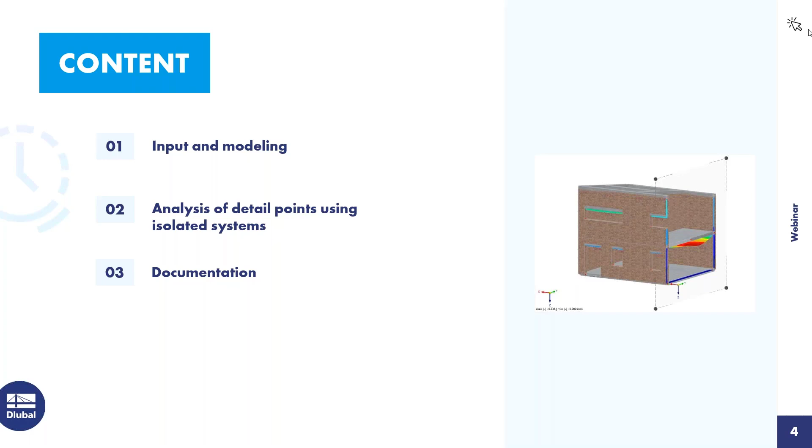So today's webinar, the content of today's webinar is masonry. Today I want to model a building from the beginning in RFEM. In the second part, I want to take a look at some detail points, especially connected to the masonry material. And in the last part, I want to show how you can document the results of the program.

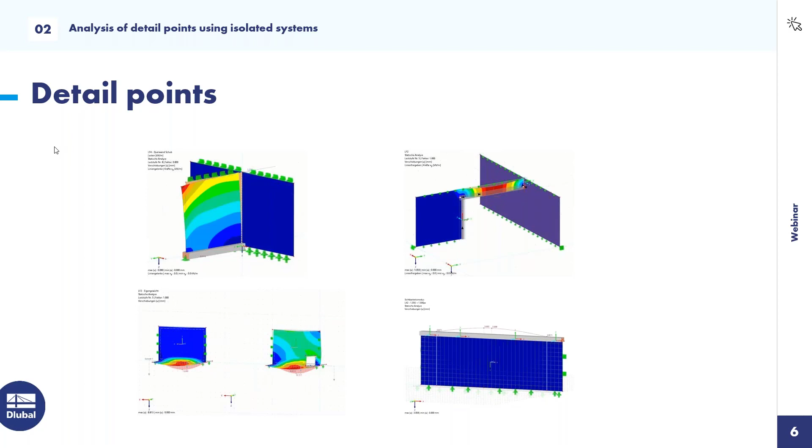In the first part, we will insert a small building in RFEM, and I want to show you how to do it. In the second part, I have chosen some separate models where I have prepared things to take a look at some details. And as I said, the last part is the printout report. So now I want to switch to the program.

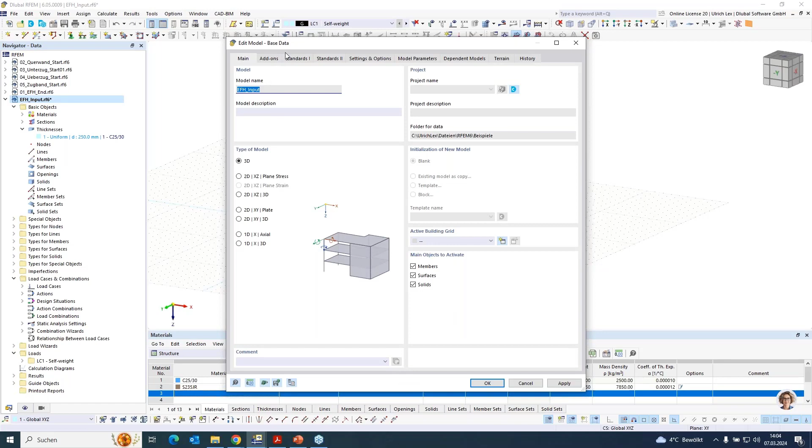Okay, I have already created a new file, a new project in RFEM. It is important when you create a new project that when you want to use masonry, that you check on the add-on masonry. Otherwise, you cannot use the material model for masonry design.

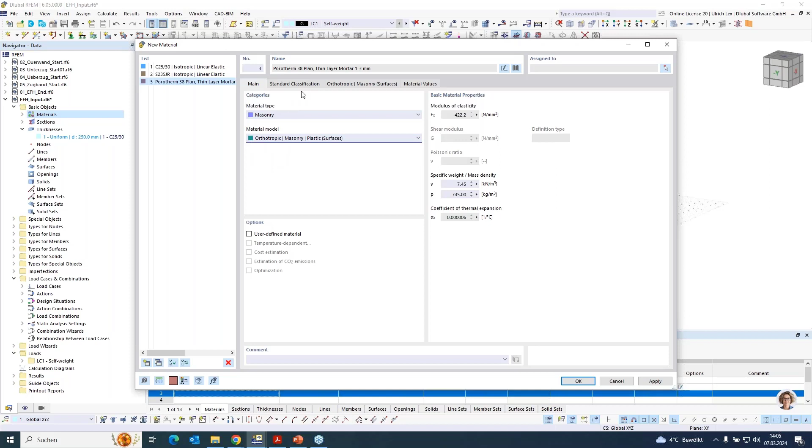So as a first part, I want to create a new material. You can use some values from the database as material type masonry. Maybe you can choose one product you want, maybe Porotherm 38, and have to choose the material model, the orthotropic masonry plastic. If there are some products not available in the database, you can also insert it manually.

In this tab, standard classification, you can choose the grouping of your product. You can choose the mortar you used. You have to insert the dimensions of the stone, and you have to insert the compressive strength. With all these values, RFEM automatically computes the data needed for the material model, such as the modulus of elasticity, the shear modulus, or the allowable or ultimate compressive strength, or the ultimate tensile strength.

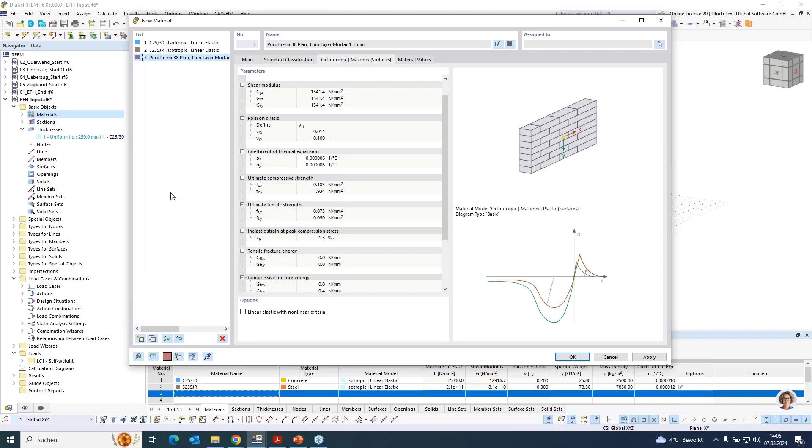So I want to create now a second material, maybe for the inner wall. It's the same as before. Choose one product, maybe this Porotherm 17-50, and confirm with OK. The second thing I want to do is create a thickness.

All surfaces do need a thickness. So the first thickness is already in, it's 250 millimeters with concrete for the foundation maybe. The second thickness I will create is 200 millimeters for the concrete slab. The third thickness I want to use is our masonry material, 380 millimeters. And the fourth thickness, I want to use the material for the inner walls with thickness 170 millimeters.

If I have done this, then I can start with the modeling. Here I have a building with the dimensions 7 by 9 meters. I use my grid points to create the first floor, 7 by 9 meters.

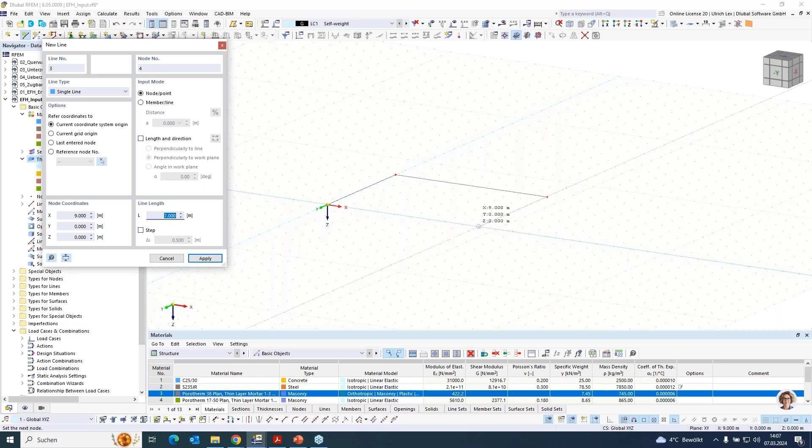Here I can directly assign, with this select boundary, my foundation plate, thickness 250 millimeters concrete. Okay, and choose the lines.

So in the second part, I want to change my work plane and create a new surface. I want to choose now the thickness for the outer wall, with a height of 3 meters.

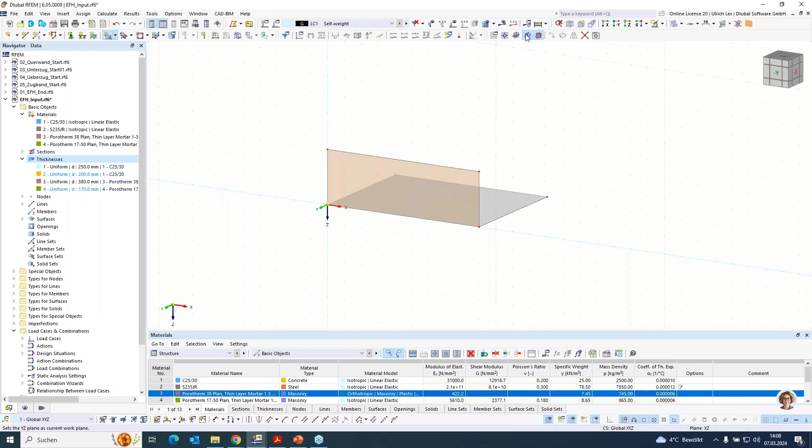I can change my work plane and create the second walls. Now I can directly copy these walls, and the first things are done.

Now I want to create the first concrete slab. Okay, and choose the outer lines.

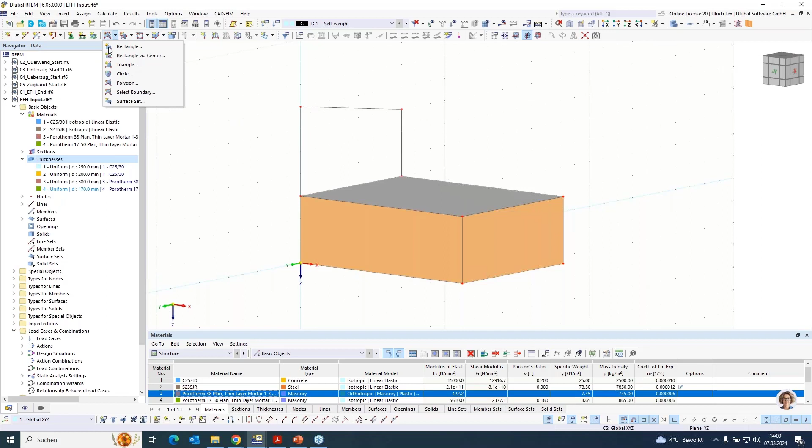So the second floor will be in the front a height of 4 meters and in the back a height of 3 meters. As I did before, I can use select boundary with 380 millimeters and select and copy this surface.

And at the end, the wall in the front and at the back. Choose all these lines, turn around it, and choose the rest of the lines.

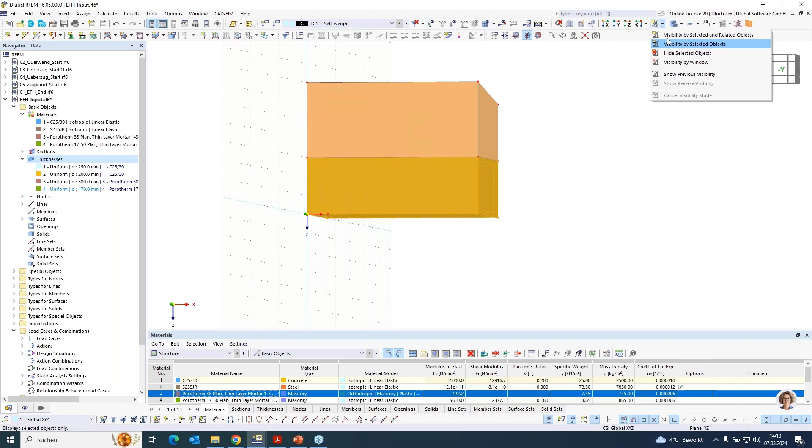Okay, now I want to create my inner walls. There I select only the ground floor, change my working plane, and start to create the lines for the inner walls.

1, 2, 3, and 4 meters. My grid has a space of 1 meter, so I can use it directly for my modeling. Change my working plane and just copy the lines to these points.

So the second wall is in the second floor. I cancel my visibility mode and create here new lines. And the second wall is maybe from here, 1, 2, 3, to here.

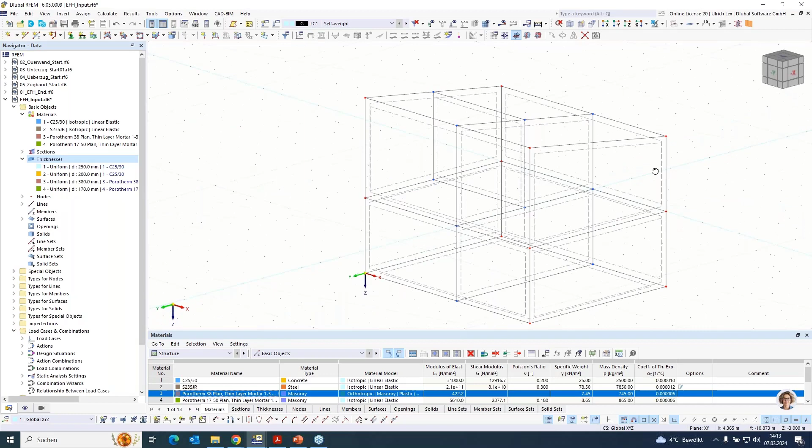Here. And the third one. So now all my walls are created.

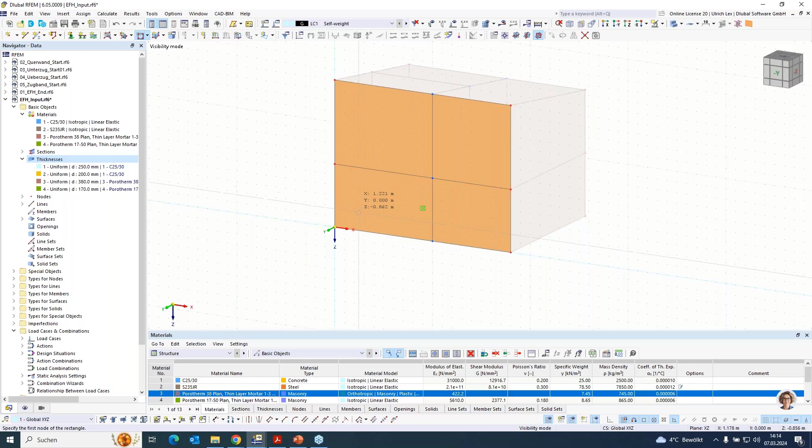As the next part, I want to create some openings like a window or a door. I select again my wall in the front, change my work plane in this plane I want to work, I change my space of the grid points, divide the space 2 times, and now I can use the option create a new opening with 250 high and 150 width. I create a new window.

Here it's one. I just want to change it to 250 meters, and create a window with 1 meter to 150.

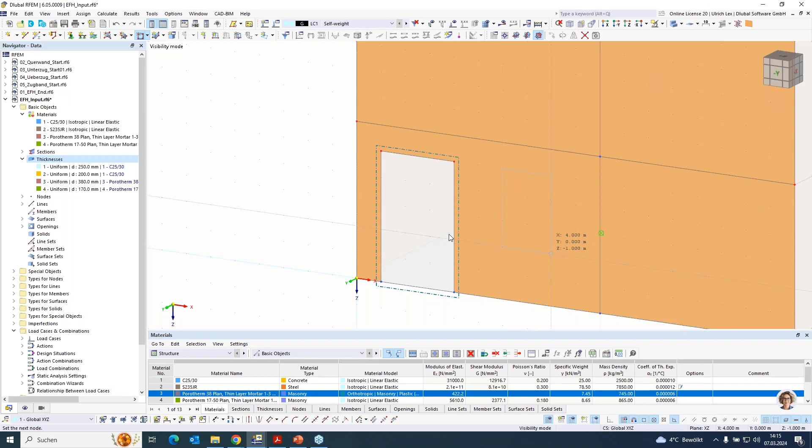The same maybe in this part, and the same in the second floor, maybe a little bit bigger window, and the same here.

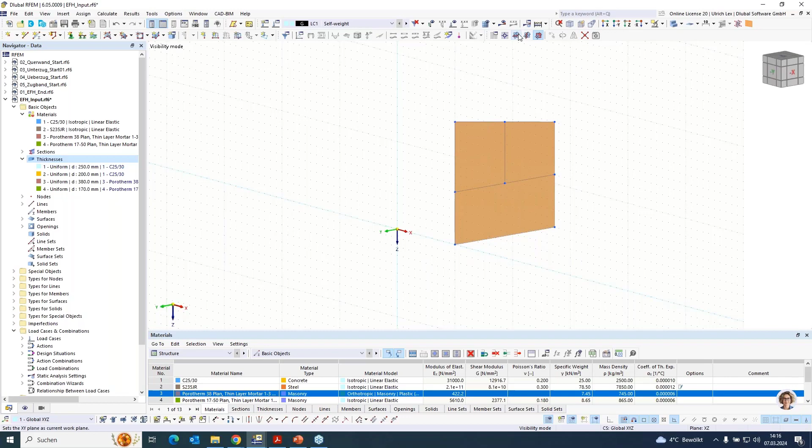In the inner wall, I want to have a door too. So I select my inner walls. I can switch off the background, the hidden objects. For better modeling, I can change my working plane, select the grid point, and can create now here a big door.

So in case of using material masonry, then it is important in case of openings that you create something like a lintel above. It's because if you do not assign a lintel, it could be that the system will be unstable because of the missing tensile strength, or the missing ultimate, or the very small ultimate tensile strength in the area above the opening. So that's why we create here now a lintel.

I double click on the line, create a new member. It's a member type beam. I want to select a new section. I can create a new section, maybe with the width of 380 millimeters and the high of 150 millimeters. Material concrete is okay. Okay.

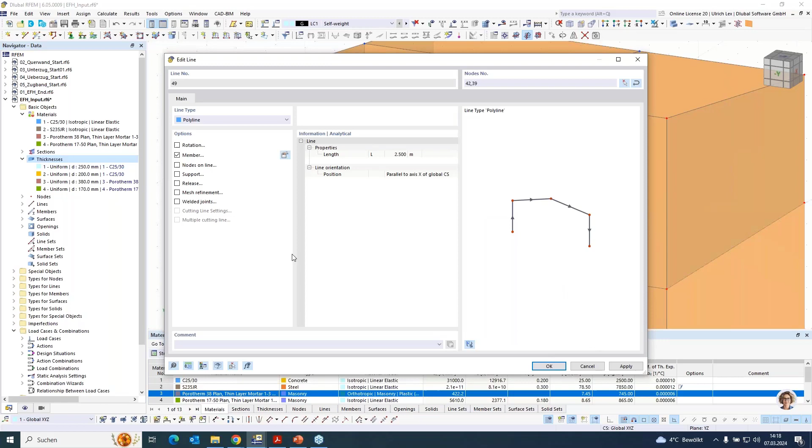And the second thing is when the window is too big, then it is good to have this lintel a little bit inside the wall. It's because the force from the lintel should not directly insert into the material masonry in one FE node. So we create a copy of this node, create a copy in X direction, maybe 125 millimeters, and the same on the right side.

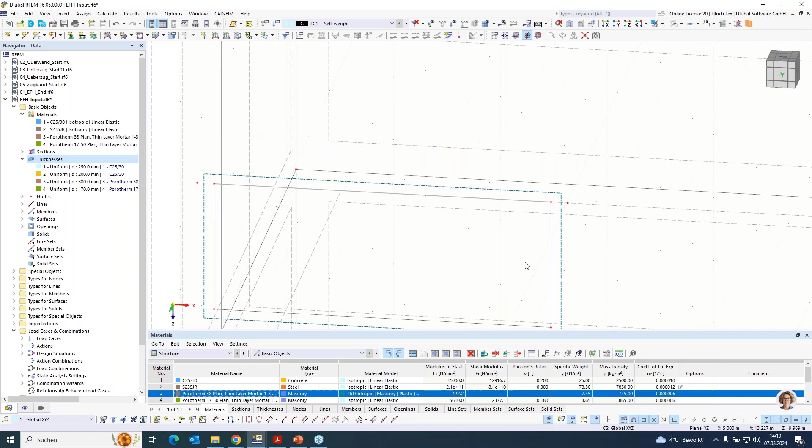And create here a line and a section too. Okay, and okay. The same for the other openings. I select all these lines, double click, and assign a new member.

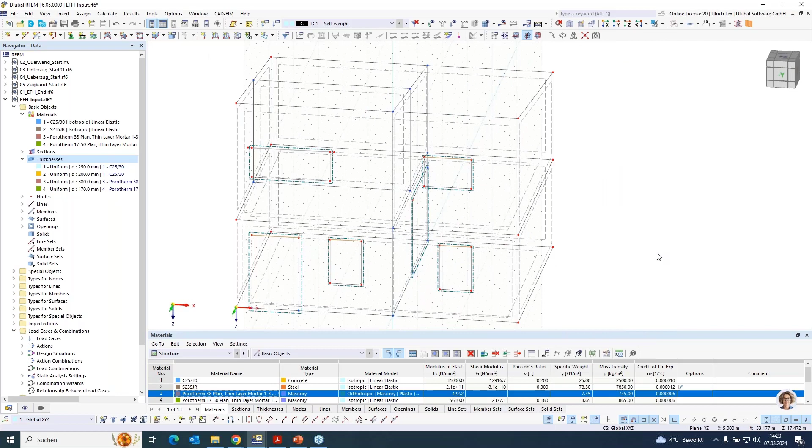Okay, the same I will do in the inner wall. I assign a new member. Here I use a little bit bigger section, so I create a new one, maybe 170 millimeter width and 250 millimeters high.

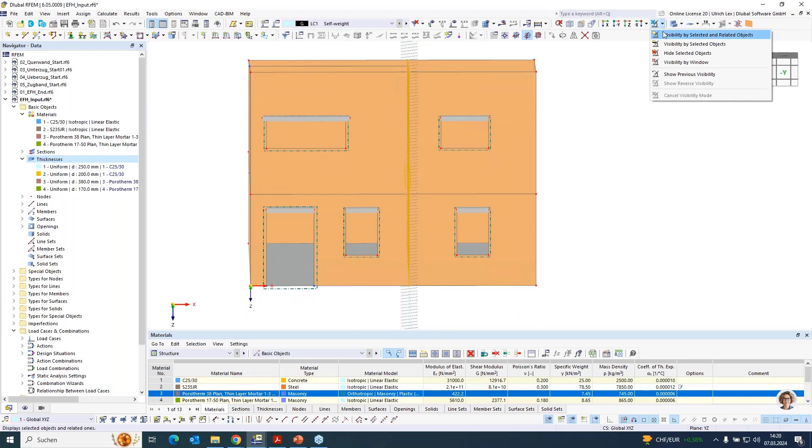Okay. Here I could create, I could let this lintel be in the masonry wall too. It would be maybe good on this place, but this example I will have in the details.

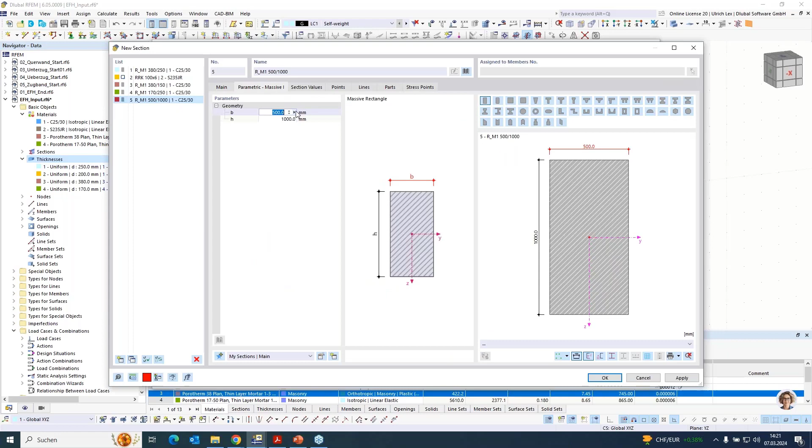So the next part on such a building is on the top of the masonry. We need something like a ring beam. You can create it easily in RFEM when you select all lines where you want to assign such ring beam, and can assign again one member, choose a section, create a new one, maybe 380 and 250.

Okay, apply with OK. And then you have created this ring beam.

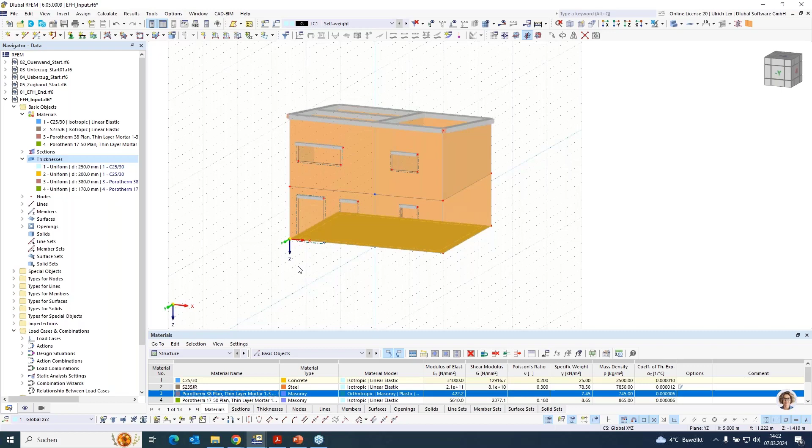As a last part for modeling, you have to take a look on the wall slab connection. It's a very special thing for masonry buildings. Each time where the masonry wall does not stand fully on a concrete slab, you need a special connection. It's called in RFEM slab wall connection, and you can assign it if you double click on the surface and assign a new hinge.

Create here a new line hinge, and here you will find the option slab wall connection. As I said, it's used each time the masonry wall does not stand fully on the concrete slab. In case the wall stands fully on the slab, the material model itself can handle it. Only if the wall is not completely supported do you need this hinge.

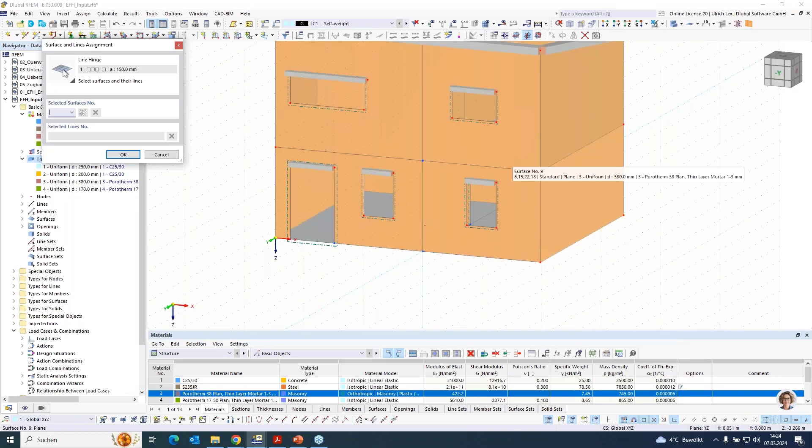So if you have checked the option, you get the new tab with wall slab connection. Here you can insert the offset, maybe 150 millimeters. If you have a block width, you can insert it; if not, we leave it at 0. We have to choose the lines where this hinge should be assigned.

It's all the lines, all outer lines. Oh, I had to go back one step. I had to first connect these lines and members, because here I have a double line, so I use this option connect lines and nodes.

So I will have no double lines and nodes in the system. Then I can assign this hinge again, create a new line hinge with wall slab connection with my offset 150 millimeters, and assign it to all these outer lines.

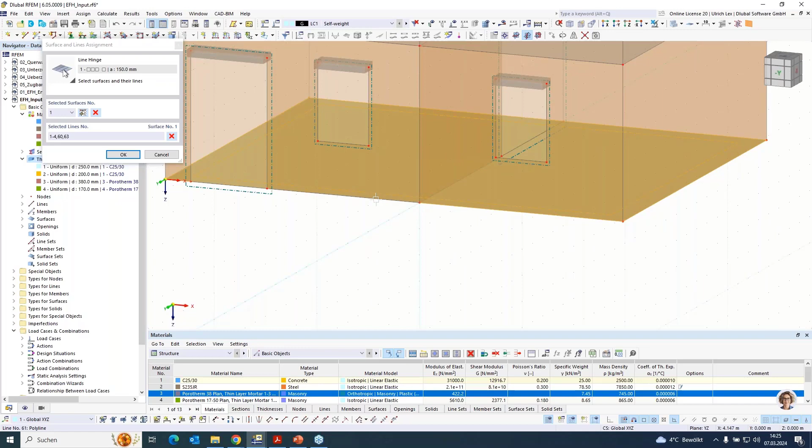Continue with OK. And now it's important to generate this line hinge with this button on the left. Now two line hinges are created. I can continue with OK, and I will see that my line hinge for the masonry wall is created.

Here I can double click. It's yellow because it's created from the master line hinge, and here is a force moment diagram assigned.

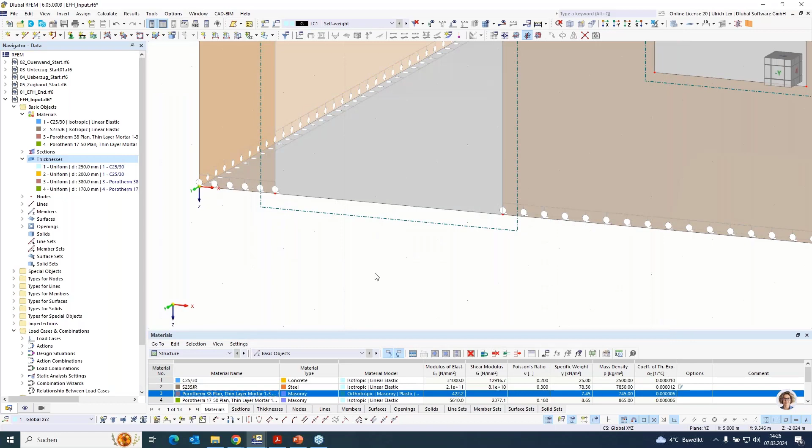Okay, I will do the same for the slab in the first floor. Double click on the surface, assign a hinge, create a new line hinge using slab wall connection.

If I have the same offset, I could use the same hinge too, but now I generate a second one. Choose all outer lines. Continue with OK. Generate the lines. Continue with OK. And now I can see that for the wall above and the wall downside, two separate hinges have been created.

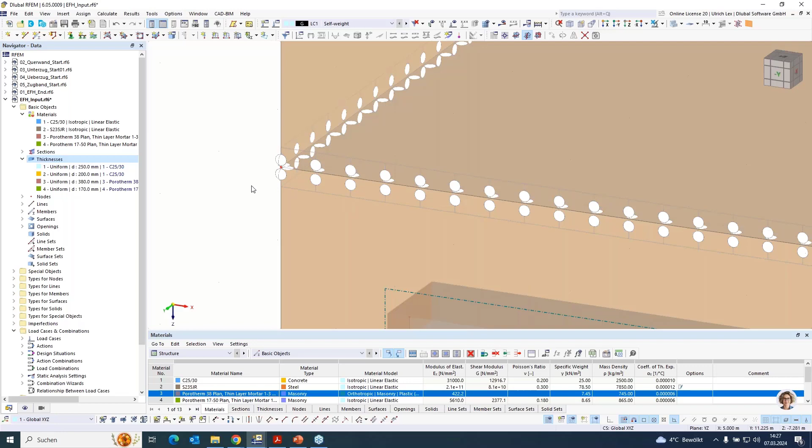Okay, as a next step, I had to choose and support. Here I want to choose a support for the base plate, supported simply as a rigid plate.

Okay, and for the last step, I had to create some loads. The self-weight is created automatically. As a next step, I will create the live load and self load.

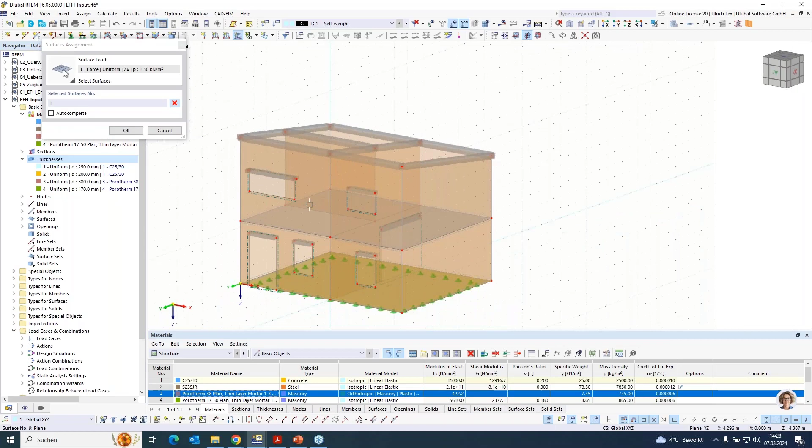Okay. Choose maybe for the self-weight 1.5 kilonewton and assign it to my slabs.

And the same for the imposed load, maybe 1.8. And continue with OK.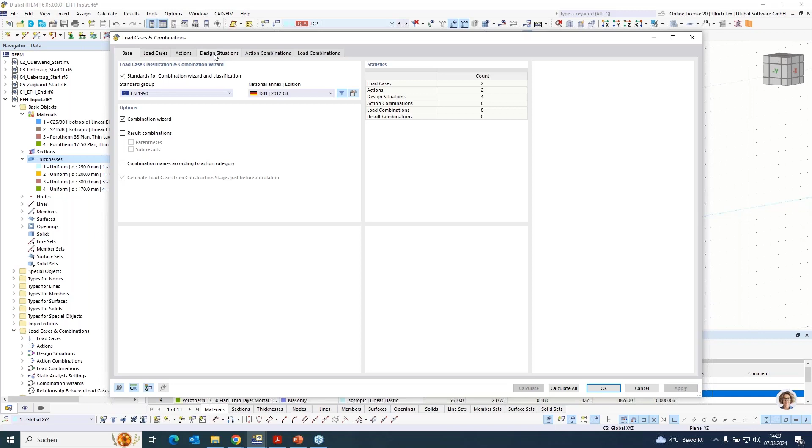The combinatoric is done automatically if you have set the combination wizard on. Then you can choose the design situations and create a combination wizard where you can choose a static analysis setting. For masonry, it's good to compute geometrically linear or with large deformations; it's best for the material model. And for the nonlinear plastic material, it's important to increase the number of load increments, maybe to 3. You can allow a little more iterations, and here you can save the results of all increments.

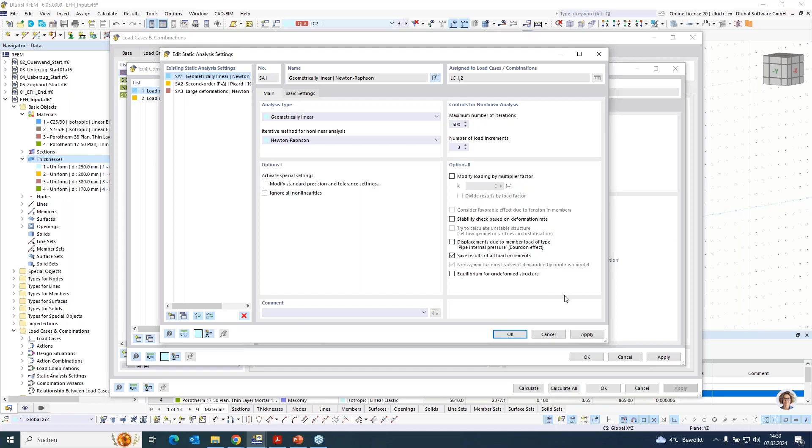Then you can take a look at increment 1 or 2 too. Okay, continue with OK, and you get now the load combinations here.

So as a last step, we can take a look at the mesh settings. For masonry, we normally use something about 0.25 to 0.2. You can click OK and apply, then the mesh will be created.

Please be a little bit careful that you have a good mesh, because it's very important for the calculation, for the nonlinear calculation.

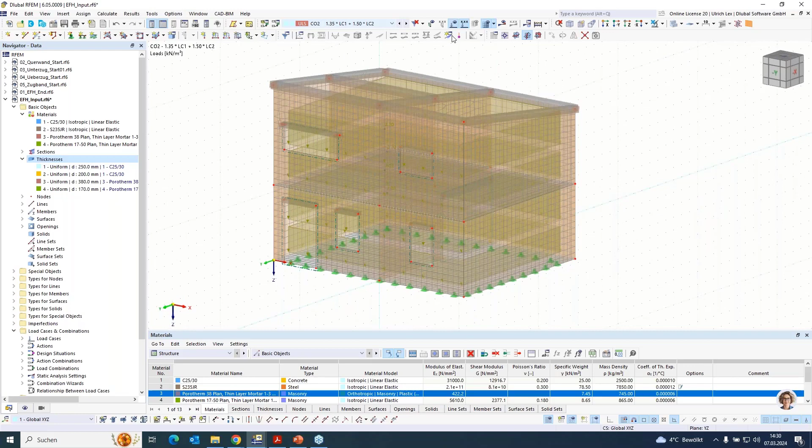After that, we can compute the first load case, and when it's computed well, we can go to the second part, to the details. Here you can see the calculation process where the system is computed with the first load increment, now the second, now the third, and then it should be finished. Exactly.

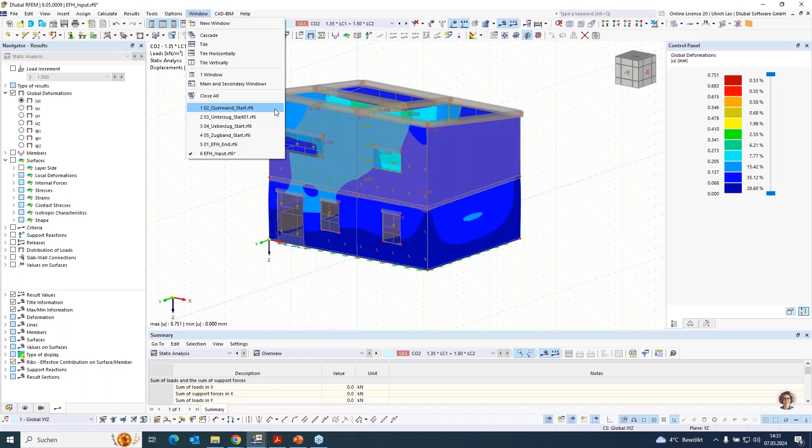Now I want to switch to my detailed systems. Here I have the first one, a part of masonry where you have maybe some outer exterior wall, and one interior wall. Mostly you have two different materials, as I chose before, like a wall with 380 millimeters width, and for the inner wall, a different material with 170 millimeters.

If you build up these walls, generally the outer wall is created, and after that the inner wall will be created. So the connection between these walls is not rigid, I would say.

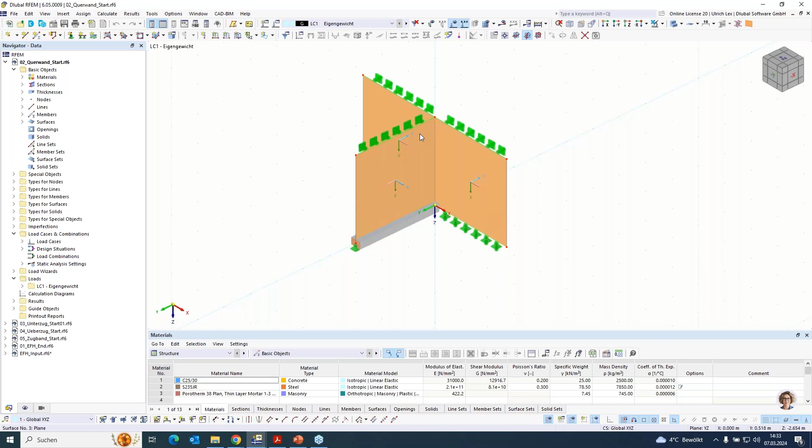Here are a lot of things you can use. One thing is you can use a wall connector. I looked on the internet and found something like this - this is a wall connector. It is assigned in each row of the masonry stone and connects these both walls. But this wall connector cannot transfer shear loads, I would say. These connectors can only transfer tensile loads. So how can you create or consider this in RFEM? I want to show you now.

When I take a look in the data sheet, I find that one connector can have a maximum tensile force of 0.5 kilonewton. It's assigned in each row, so you have 0.5 divided by 0.25 from the height of my stone. Then I will have a force of 2 kilonewtons per meter in this edge.

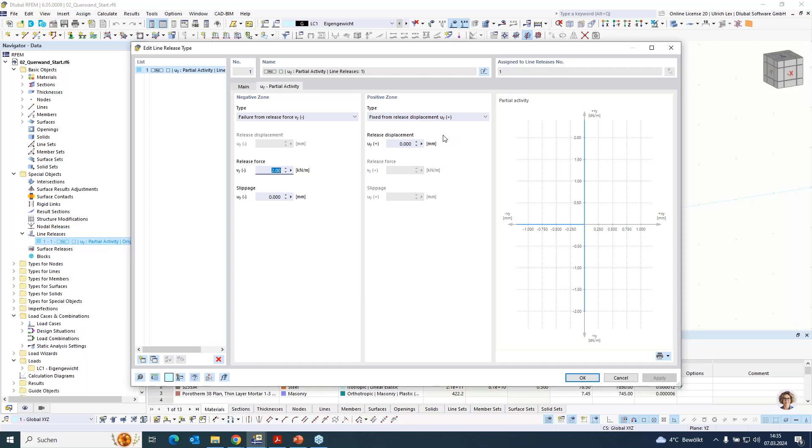To create this, I can use the special object line release and create a new one. As a release type, I can choose partial activity in Y direction. This partial activity could be that the connection is released from a force of 2 kilonewton per meter. In the pressure direction, I would say it's fixed now, but here you can release it too.

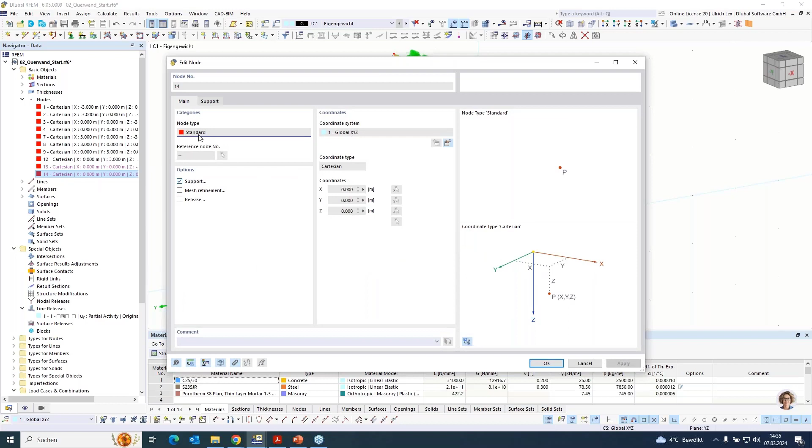So this release I can assign to the surface. I can say my released objects after that are the surfaces. Continue with OK. Now the whole line is released. That's why I have to assign on node 14 - this is this node - a new support. My system will get unstable. Okay.

So after that, I will create a new force, maybe a horizontal force of 5 kilonewton in direction Y. Okay, and I want to compute this system. So for the mesh, I set it as before, about 250 millimeters. Here I increase the load increments so I can show you the results better.

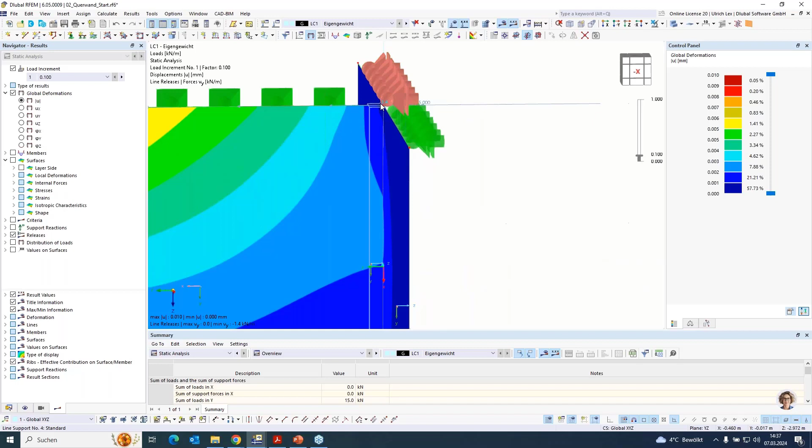So you can see that the inner wall is released from the outer wall. When I go some load steps back, maybe in the first one, we can see that the lines are connected - we only have a force of 1.4 kilonewton. When I increase the load, you can see that the release of this inner wall is getting on.

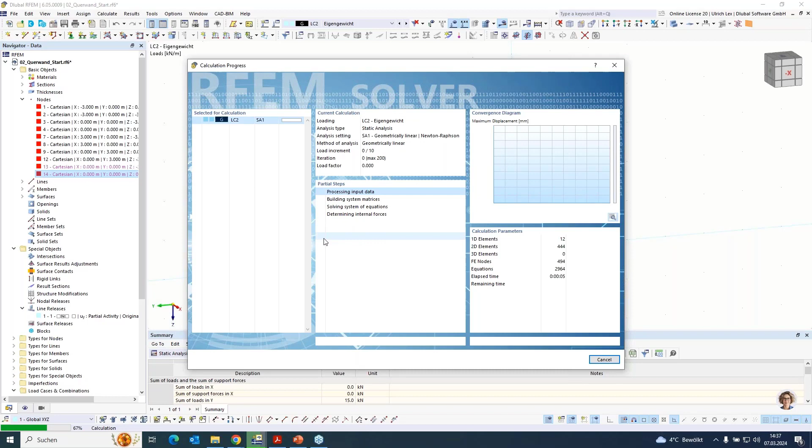As a test, we can create a second load case where I copy load 1 and change the direction of the load. And here it should now be connected to the outer wall, to the outer wall. And this is exactly what we want to have.

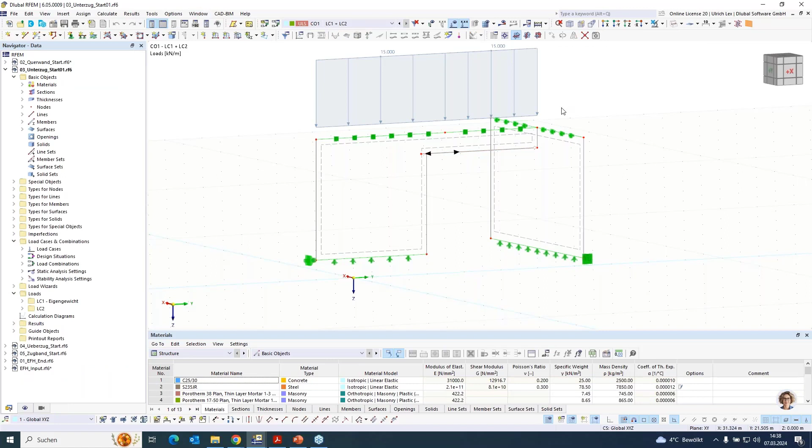As a next example, I want to show you my system with the lintel. Here I have the problem that the connection between the inner wall and the outer wall is not, I would say, not connected. Only the lintel, or the force from the lintel, should be reacting in this outer wall.

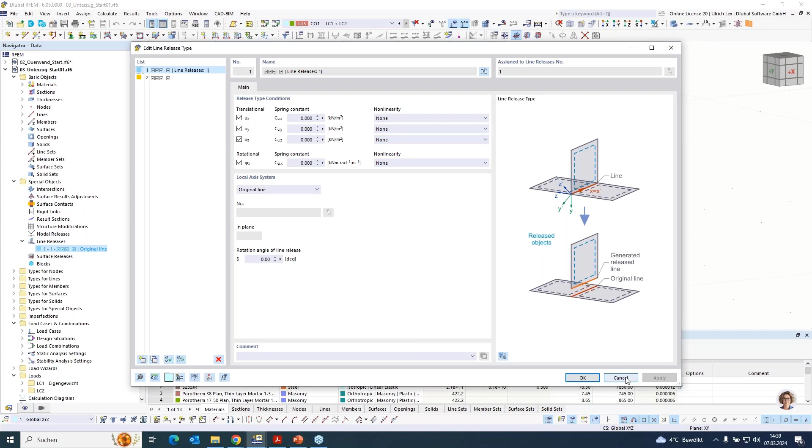So I can continue as before and create a new line release. I assign it to this line. Okay. Now I choose the release type 'fully' because I'm not sure if here a wall connector is really built. So on the safe side, I did not connect these two walls on this place.

So I have to release the wall. And now I want that the force from the lintel acting is not released - it should be acting on this outer wall. That's why I can define this definition object, my node 4. So there is no release created, and the force is acting on the outer wall.

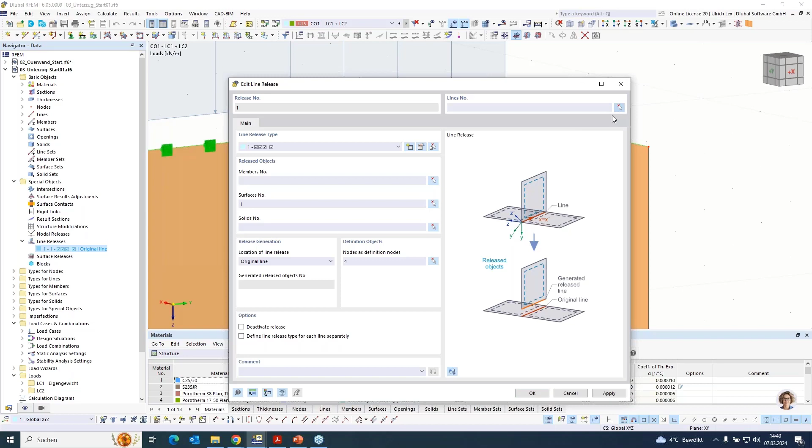Continue with OK. And now I see on this one node, no new node is created, and here a new node, a release node, is created. Okay, just take a look on the results.

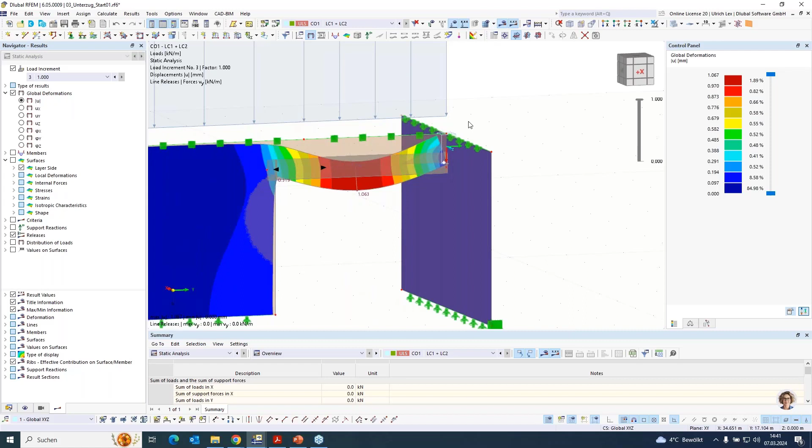And when I take a look on the deformations, I see that my masonry material is released, and my lintel force is acting on the outer wall. I can also see this when I take a look only on the outer wall. And here I see that the whole load from the lintel is acting on this one FE node.

Maybe this could also be a problem, that here so much load is acting on one node.

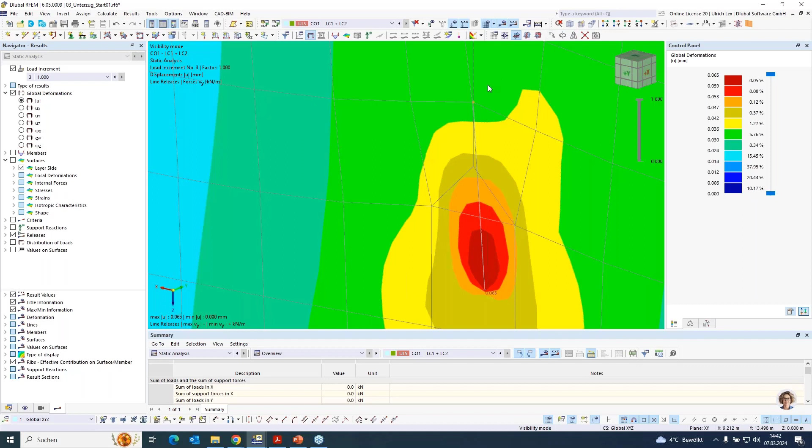If this is a problem, then you have the possibility to copy this one node, and a second time in the other direction, and create here or assign a small beam, maybe a rigid beam, so that the force is smoothed in this point.

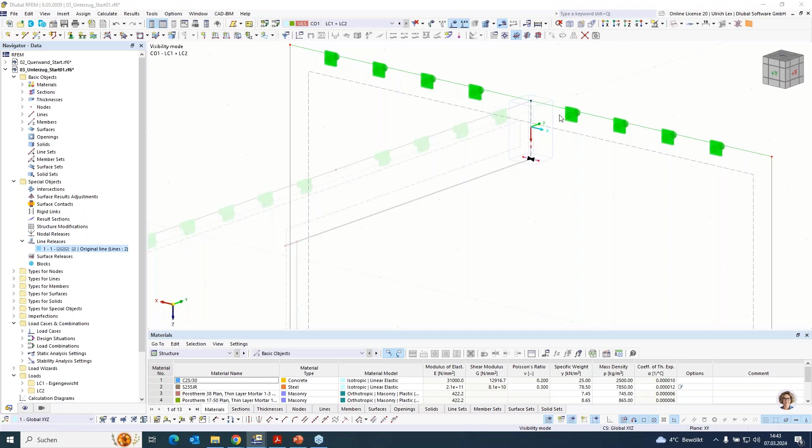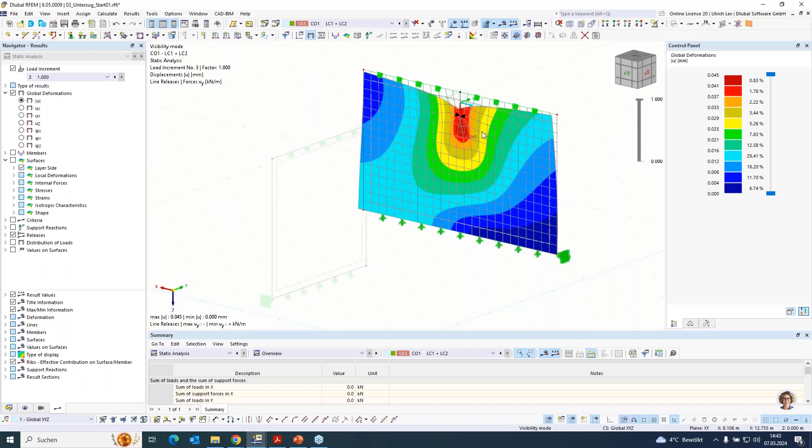If you take a look on the results, it should be the same as before. Only with the smoothing in this one node, the force in this node is a little bit smoothed. So this could avoid some problems if one point of the material is overloaded.

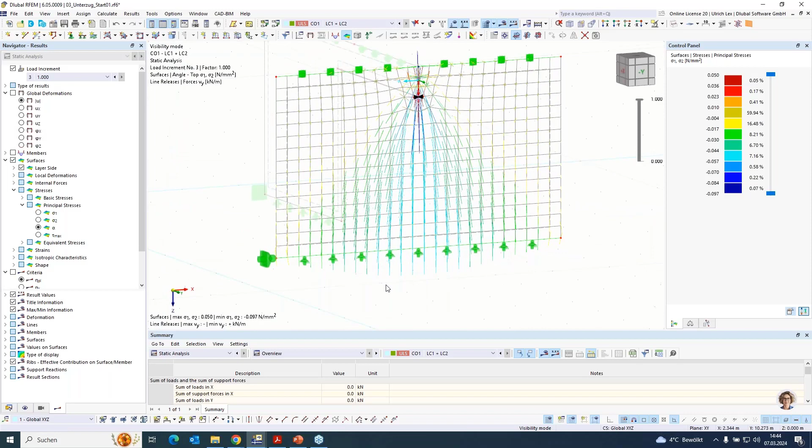So here you can see when you take a look on these criteria - or maybe not the criteria, if you take a look on surfaces and the stresses on this alpha - you can see the load distribution in the wall. As is common for masonry, we have a distribution from maybe 60 degrees in the wall, and the same you can see in the support reaction, where we have in this area this load from the lintel.

Okay, on the second side, there could be problems too. When we have here now a too big force from the lintel, it's depending on what is on the floors above. It could be that on this place maybe should be located a concrete column, but this is also easy to do.

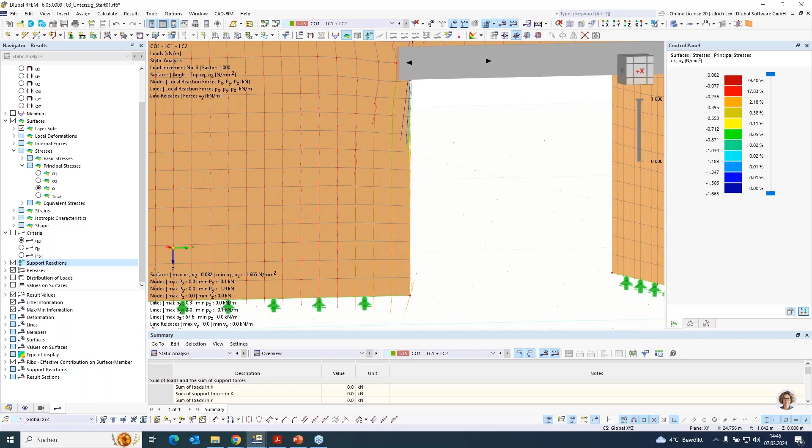When you double click on the line, can you create again a new member, as a beam, and create here a new section. Maybe 170 to 170, as a concrete column.

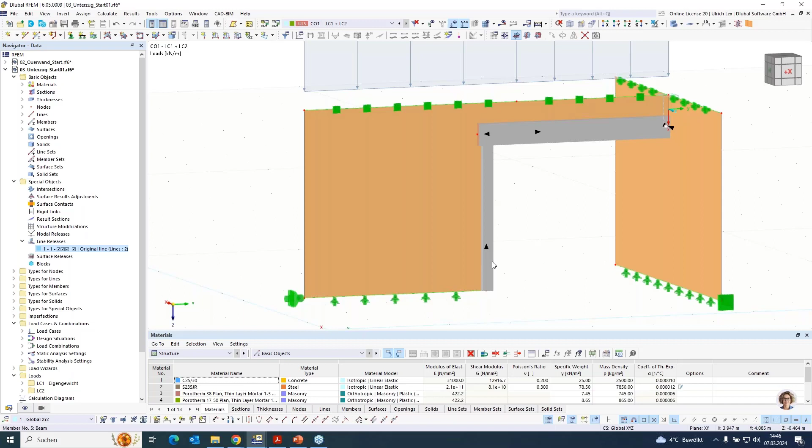So one thing you have to do, or think about, is that the masonry wall is now connected fully with the concrete column. Here you can insert again something like a new line hinge, and let it free in z direction, so that no shear force is between the concrete column and the masonry wall.

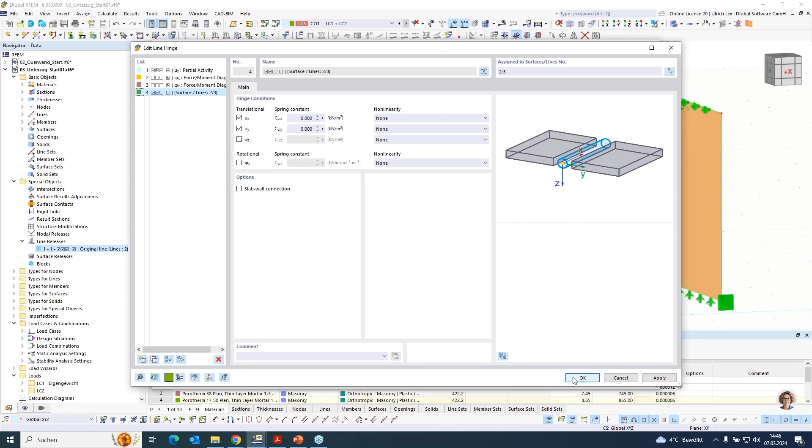Okay, so these were the problems of this example, and now I can take a look on the next example.

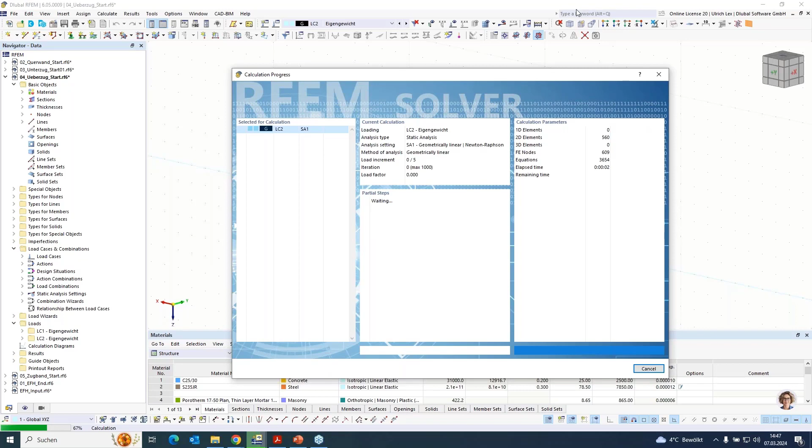When you have something like a wall above a concrete slab, where you have no support in the floor below, then when you take a look on the results, you will see that the masonry wall is acting similar to a beam. You will have some forces like a pressure arc in the masonry wall.

It's normally only important to know it, because when here now should be created afterwards an opening, then this pressure arc is destroyed and the behavior of the wall is different, and therefore you need maybe more reinforcement in the concrete slab.

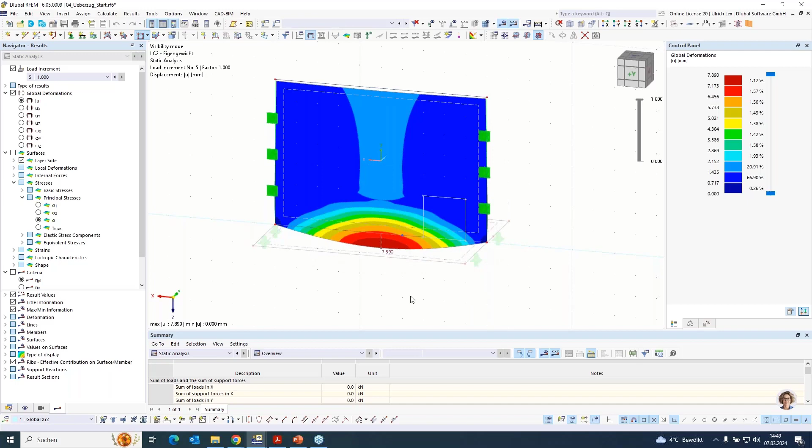I want to show it now. When we take a look on the deformations here, we have 7.9 millimeters. When I create now an opening, maybe for the heating or something else from the house technique, then you will see that the deformation of the wall is increasing a little bit. Therefore, you need more reinforcement in the concrete slab, and therefore you have to consider it in your static model.

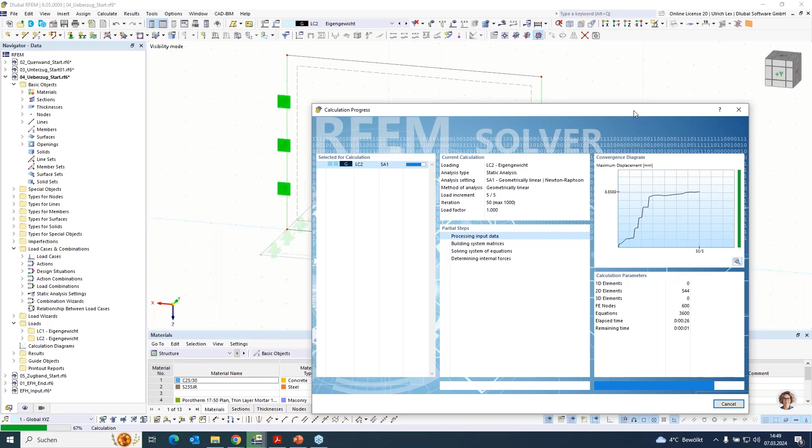So you see the deformation is a little bit higher. When we take a look on these trajectories, you see this pressure arc is destroyed. More force is acting on the concrete slab. Therefore, you have to consider it.

So the last example is one example from the roof, from the top floor. Sometimes you have to consider some wind loads, tension loads from the ring beam, and have to anchor this in the concrete slab.

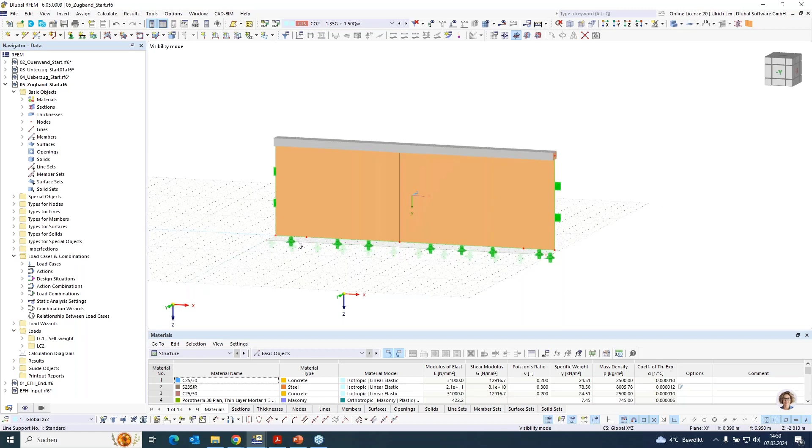This you can do easily when you create a new beam. You can here use the tension beam, and you can insert this tension beam into the surfaces, maybe like this, and tension, and like here.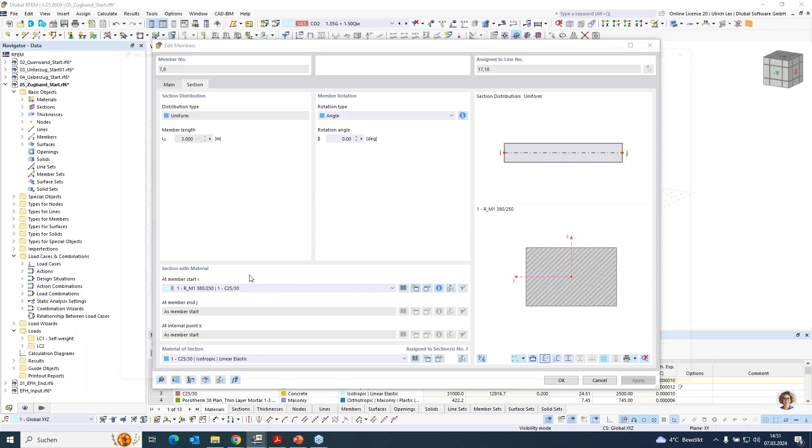Here I want to change the section. I can create a new section. I have already created maybe a section of 12 millimeters.

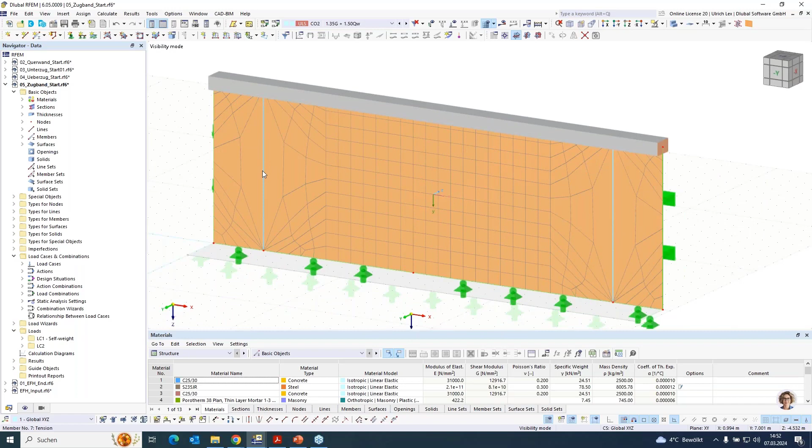As a tension. But now when you create the mesh, please be careful, because you are using now a tension beam, and the tension beam is not meshed, it's only meshed on the end points. And here it's generated or integrated to the surface. Therefore, we have to double click on the surface, go to the tab integrated, take off the automatic detection, and take off these two lines. Therefore, only line number 5 is integrated. Continue with OK. And this means that this beam now have no connection to the surface.

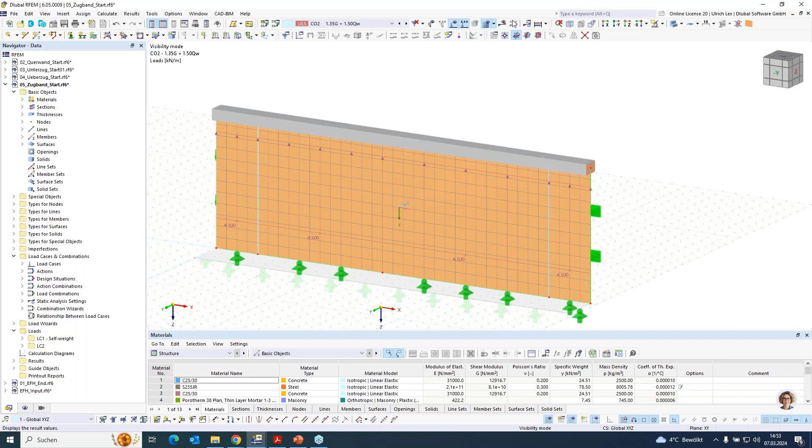Now when you create some new mesh, then everything is okay again. I have created a load like tension in this direction. When I now compute it, you will see that the force is acting in the beams. Or not. Where is my mistake?

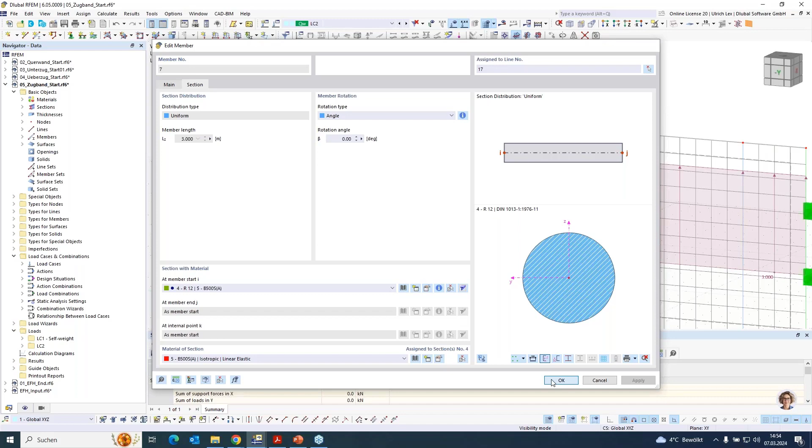Just one moment. Somewhere I have to do a mistake, but I want to switch to my second file.

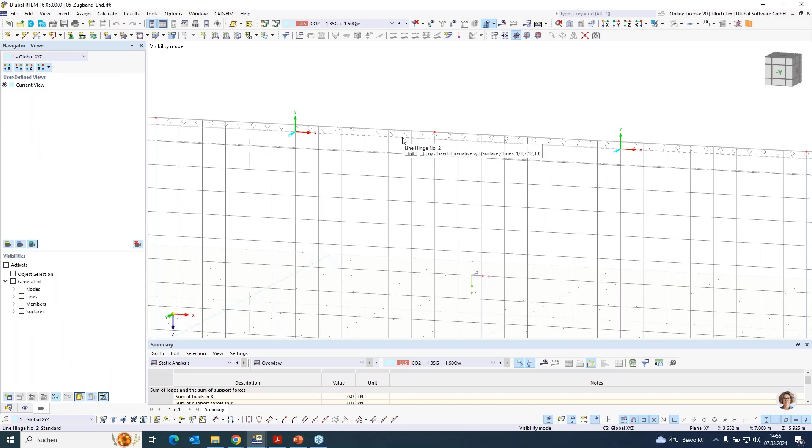So here you now see that the load is acting on the tension beams and not to the wall. That it is not acting on the wall, you had additionally to assign a line hinge, that the ring beam is not connected to the masonry wall. Here I created a new hinge with the non-linearity that it is fixed if the force is negative, and that means if the force is tension, then it is free, and if compression, then it is fixed.

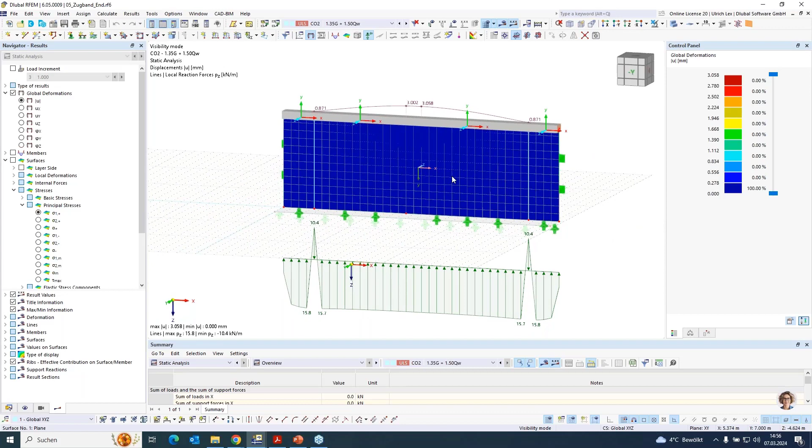Okay. And here you can see that in the wall there are no loads from the wind action. It's only in the concrete slab.

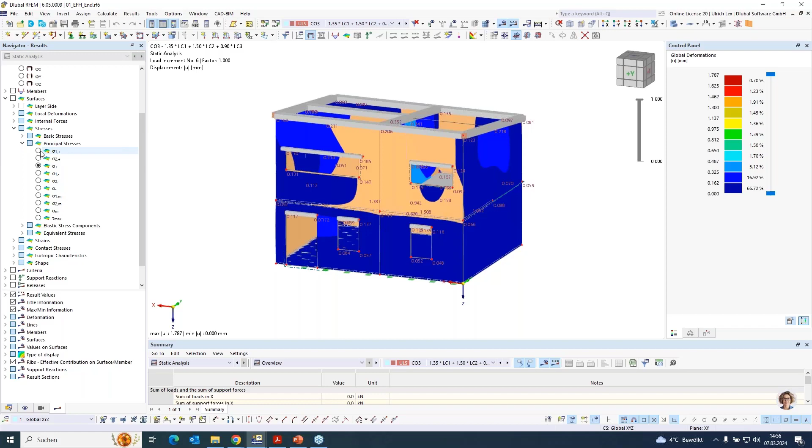On this part I want to switch to the third part and go back to the building we created before. For the documentation, you can use all things what we have in RFEM available. The most important thing is, I think, the stresses. You can take a look on these strains, because when the strains are too big, is it a hint that any cracks are existing in the masonry?

I showed it in a webinar before, where on the slab, this sliding slab on the edges, where cracks are here.

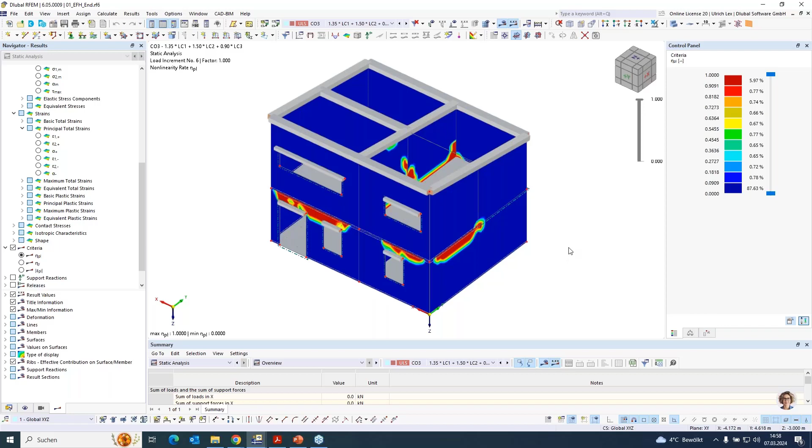You can take a look on this criteria. This criteria is a hint where the masonry is in the plasticity of the masonry. It's not a hint that it's overloaded. There are two states. One is in the plastic state, and blue is in the linear elastic state. But here you can see where big loads are in the system.

And of course, we have the printout report. If I open the printout report, you have a lot of tables, a lot of things implemented. All things what you have inside, and you have also documented the things from your material.

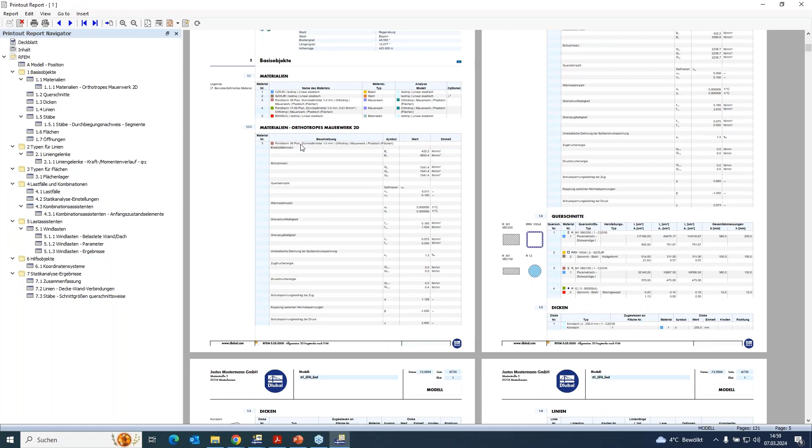I just want to switch the language. You have also documented the material properties from your masonry. It likes... just set the language to English. And open it again.

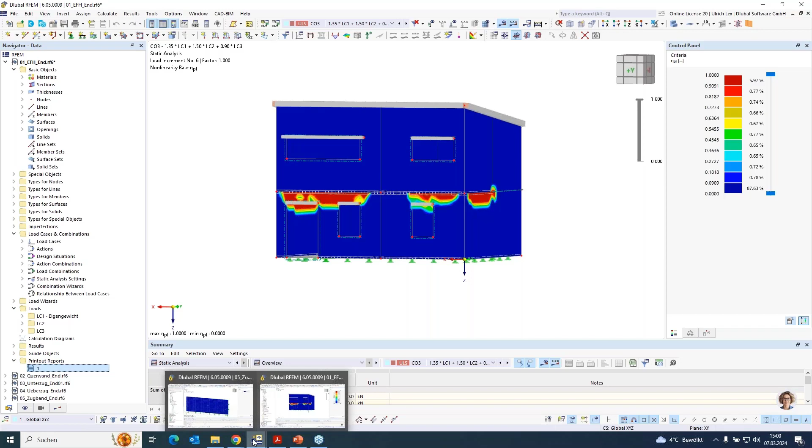So now it's okay. Here you can see the ultimate properties from your material, what you have used for calculation. So a design check for the material does not exist because of the calculation. It's a plastic calculation, so we cannot give any ratio. It's only when the calculation is done, fully done, then the ultimate strength is okay. And this is the design check, the only design check what we have.

Okay, on this part, I'm on the end of my presentation. I want to say thank you for listening and want to go back to give back to Andreas.